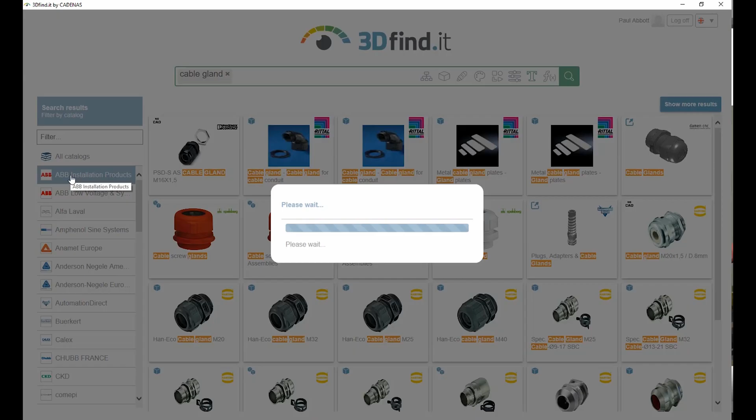Searches can be performed using classifications, geometry, filters, sketches, and much more. Here we are searching for a 30mm cable gland using text alone. We can narrow down the search by filtering different suppliers, or even add an additional search term to look at a particular standard. We can visualize the 3D model for the part, or even the 2D drawing.

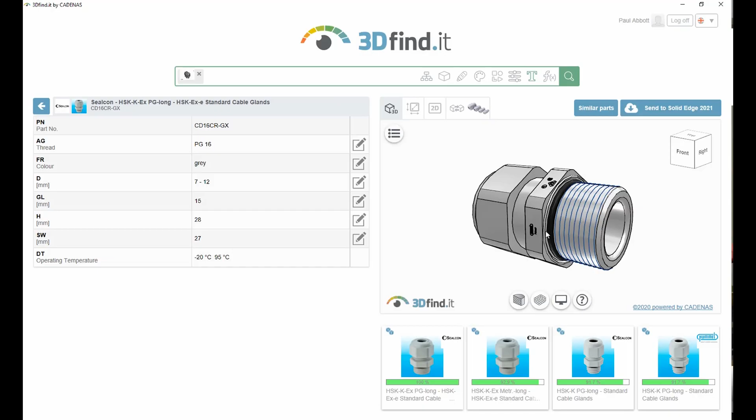Individual parameters for the part can be defined. The 3D models can be sectioned, and users can even search for similarly shaped parts. Parts may also be compared.

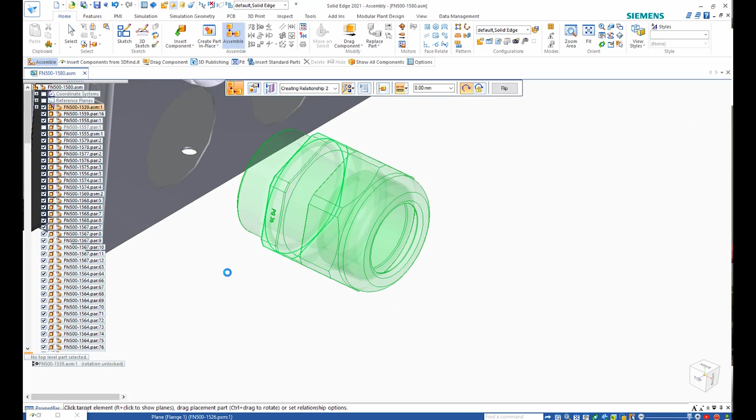A compare function graphically illustrates the difference between the last two parts found. This allows users to ensure they have exactly the part they need or to choose another part to compare if necessary. Once the desired part is located, a single click adds it to a Solid Edge assembly, allowing us to assemble it where required. Next, we need a blanking grommet.

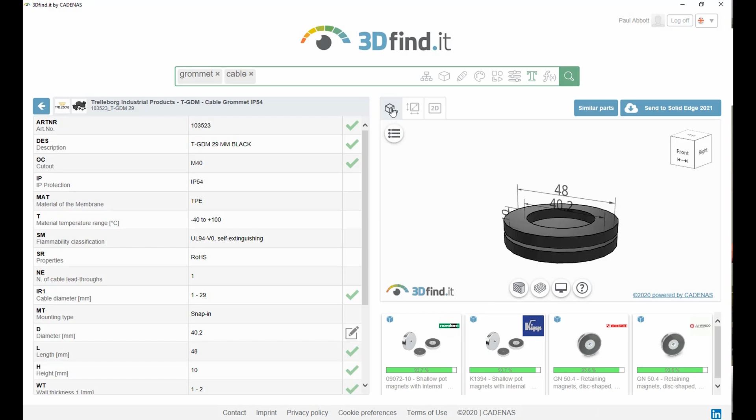This can be selected and placed in the same way. We launch 3Dfind.it, run a text search, find the part we need, and define the appropriate parameters. In this case, the diameter.

The next cable gland needs to clamp a 3mm cable. In order to find an appropriate matching gland, 3Dfind.it allows us to use an existing 3D model to perform a shape search. In this instance, once the appropriate file is selected, the size-dependent slider allows the search scope to be defined before running the search.

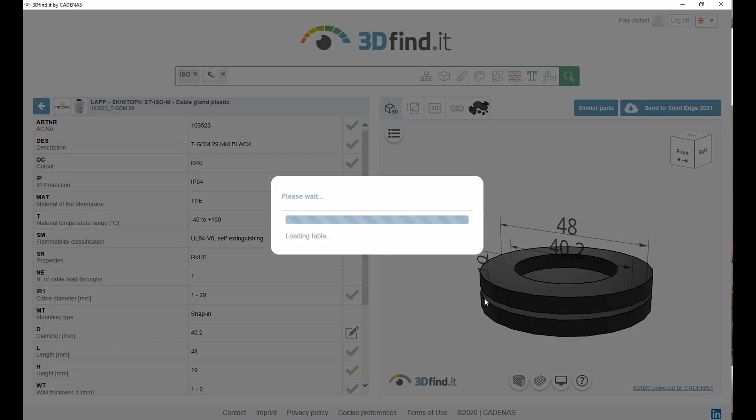We could also narrow the search down by adding other search terms. Once the desired part has been found, the parameters can be defined and the part added to our assembly. Relationships are added in the normal way.

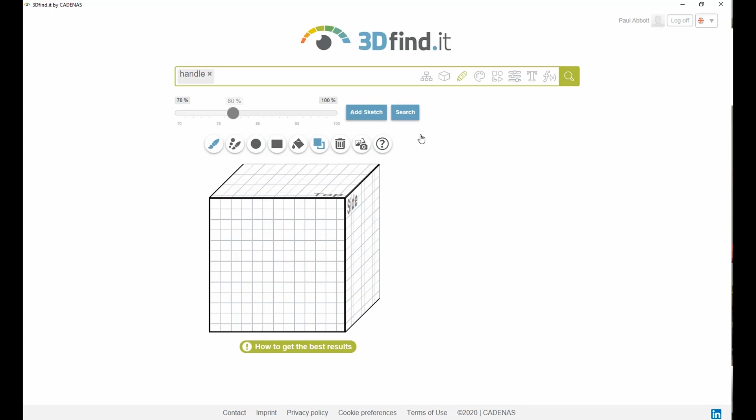We now need to find a handle for the top of the case. Going back to 3Dfind.it, we'll do an initial search for the text term handle. This returns many results, so we need to narrow this down by providing a sketch and simply drawing the shape of the handle we need. Once we have located the appropriate handle, we can define its parameters and add it to our assembly.

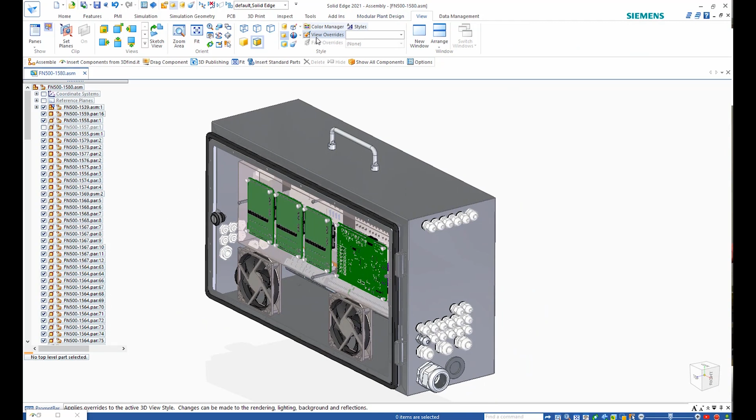The CADENAS 3DFind.it search engine provides access to millions of 3D CAD models in native Solid Edge formats from more than 800 manufacturers, increasing your efficiency in finding the parts you need for your design.